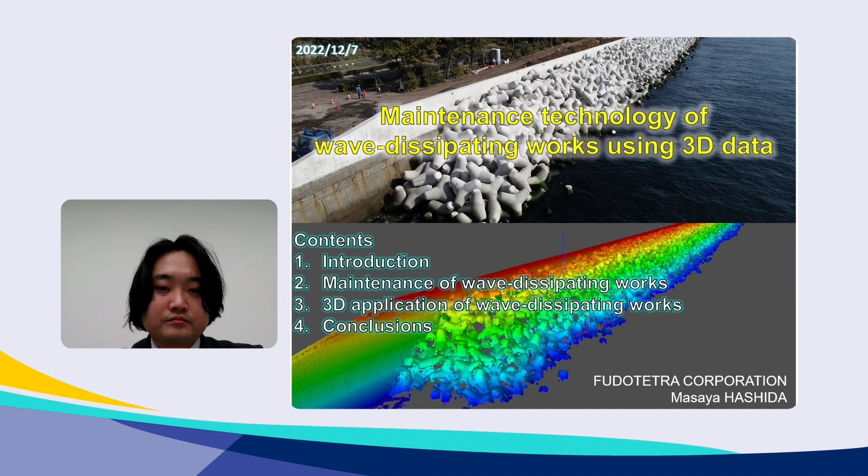While the Japanese population is aging and shrinking, productivity improvement in the construction field is also an important issue. The utilization of ICT, which means information and communication technology, and 3D data of structures is expected to contribute to labor saving, cost saving, efficiency improvement, and sophistication of construction works. 3D model information, such as point cloud data and solid models of structures, has begun to be shared through the entire construction stages of survey, design, implementation, and maintenance. This is in line with the construction policy of MLIT, the Ministry of Land, Infrastructure, and Transport.

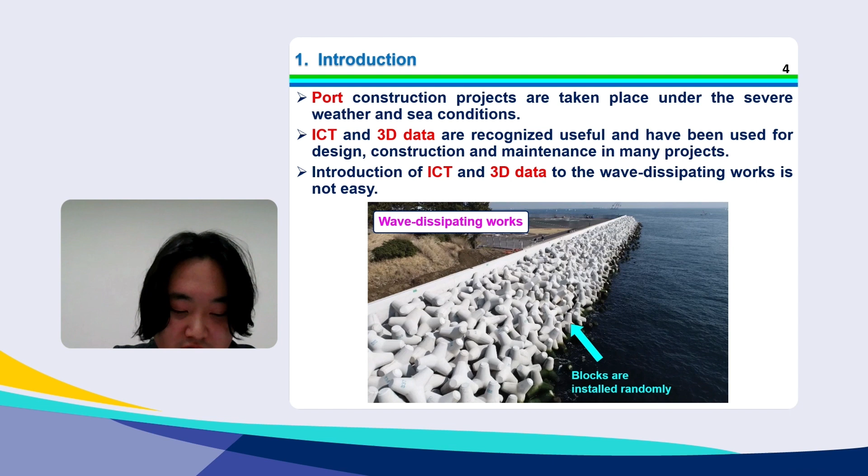As you can see, introducing ICT and 3D data for wave dissipating works is not easy. Today, I present the application of ICT and 3D data to wave dissipating works.

After installation, wave dissipating works gradually deform due to external forces, mainly waves. A deformed trapezoid may not be effective against waves and can cause overtopping and rough sea conditions around the facility. So the deformed area should be restored to the original trapezoid, but diagnosis is not easy because investigation is hindered by the complexity of the shape and the accessibility of the location.

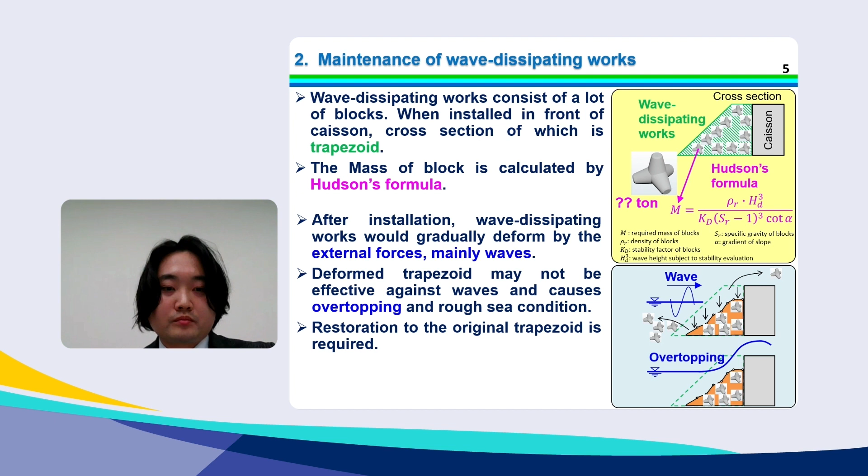This is dangerous and time-consuming work. The height of wave dissipating works is measured at each section and repeated in the direction of the breakwater extension. The outcomes are a number of drawings of cross-sectional profiles.

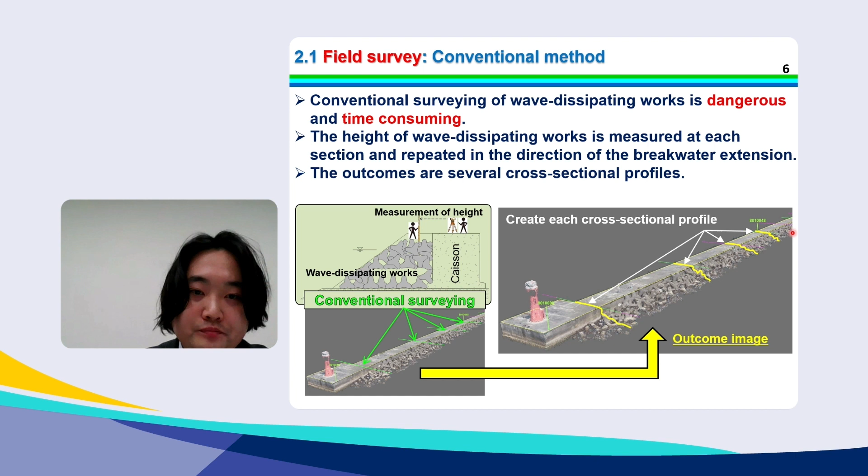Next, quantity calculation. When wave dissipating works has subsided, blocks may be replenished to recover the function. In order to determine the number of blocks required, it is necessary to calculate the replenishment volume. In such cases, the replenishment volume is generally calculated using the average cross-section method.

Conventional method is to take a specific cross-section which represents a certain length of a section of wave dissipating works, and the section volume is obtained by multiplying the area by length. Final volume will be obtained by summing up these section volumes. I call this method 1. The cross-sectional profiles are measured by a manual survey, as already mentioned.

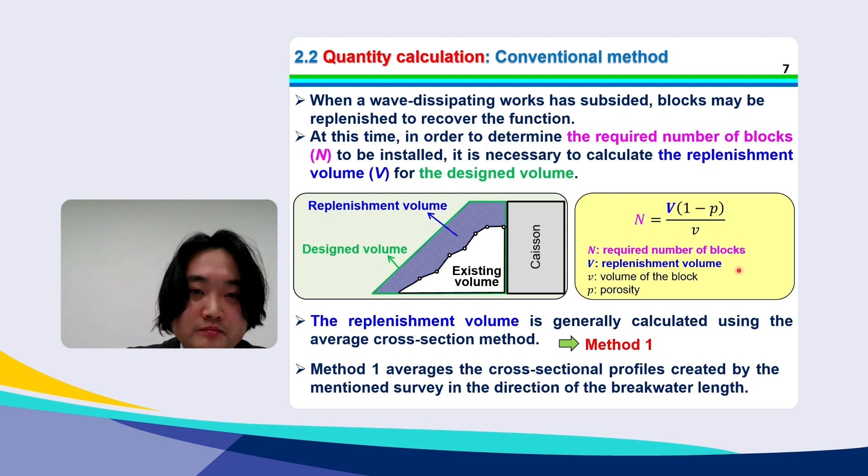Next is implementation. Block installation is conducted by a crane operator following the instruction given by underwater divers. As the target position of each block is not obtained by the conventional method, the installation is conducted by careful and harmonized cooperation of the crane operator and the divers.

The exact position of the block is only instructed by divers at the site. Divers sometimes go closer to the block to check the position and take the block to the exact position. This is very dangerous and time-consuming work because the block is unstable due to wave and current movement.

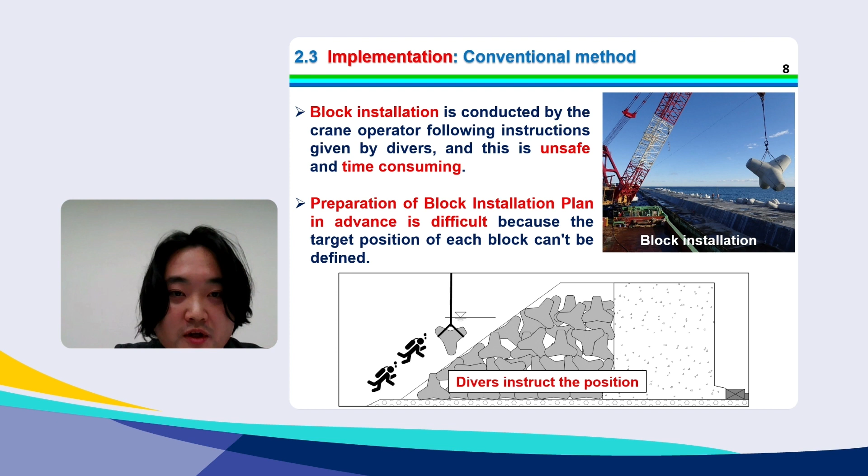Starting this slide, I will show you our study of applying ICT and 3D data on wave dissipating works. The first slide is UAV survey. UAV means unmanned aerial vehicle, commonly called drone. The main purpose of the UAV survey is to understand the three-dimensional condition visually and quantitatively.

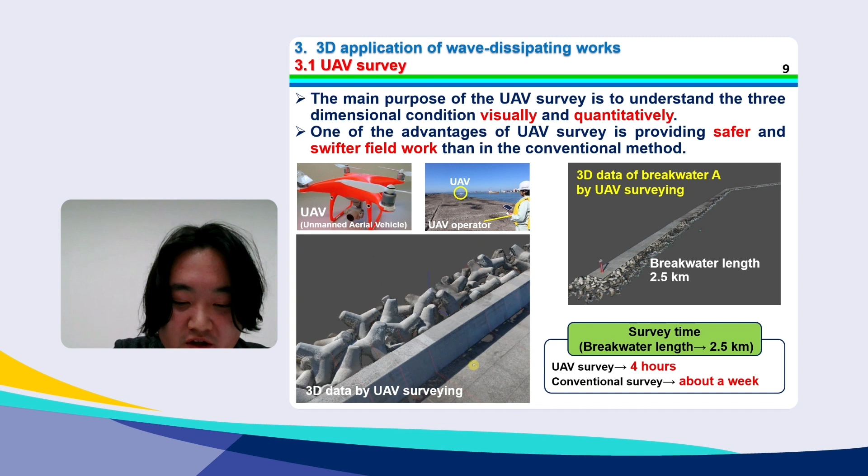As you can see in this video, the 3D data obtained by UAV surveying can be viewed from all directions. Please watch for a moment.

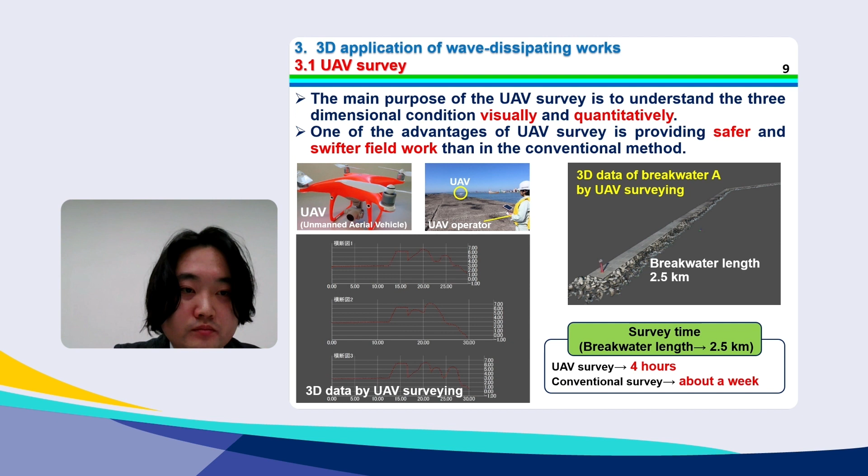One of the advantages of UAV survey is to make the field survey safer and swifter than the conventional method. As shown in this photo, nobody has to stand on the block, so it is safe. In addition, we can reduce the working time.

For example, the right figure shows the 3D point cloud data of a 2.5 kilometer long breakwater. The survey time on site was about 4 hours. On the other hand, when we conduct conventional survey, it needs about a week.

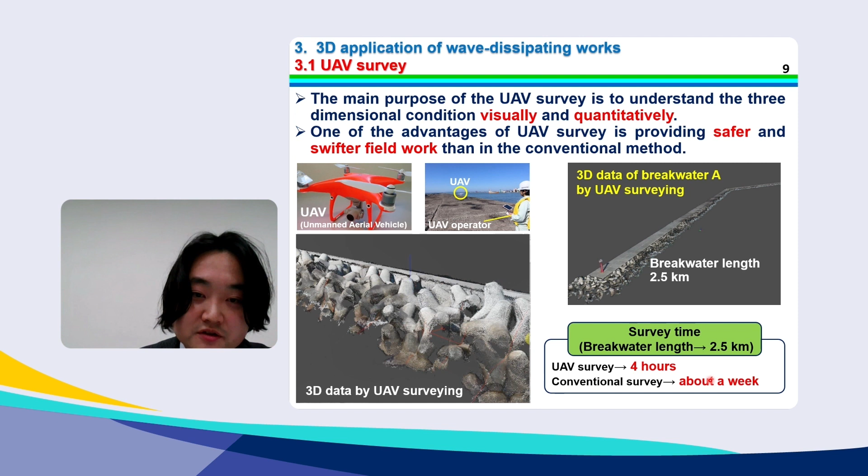Next, quantity calculation. As already mentioned, conventional method is a two-dimensional methodology: the summation of the average cross-section multiplied by the length of its representing length.

The replenishment area of each cross-section was obtained as the difference between the existing and the design cross-sectional areas. The replenishment volume was calculated by multiplying the average of the replenishment area of the two adjacent cross sections by the interval length.

On the contrary, 3D data gives us a direct approach to calculation of the existing volume. As you can see in the drawing, replenishment volume is obtained by a simple calculation of VD minus VE. I call this method 2.

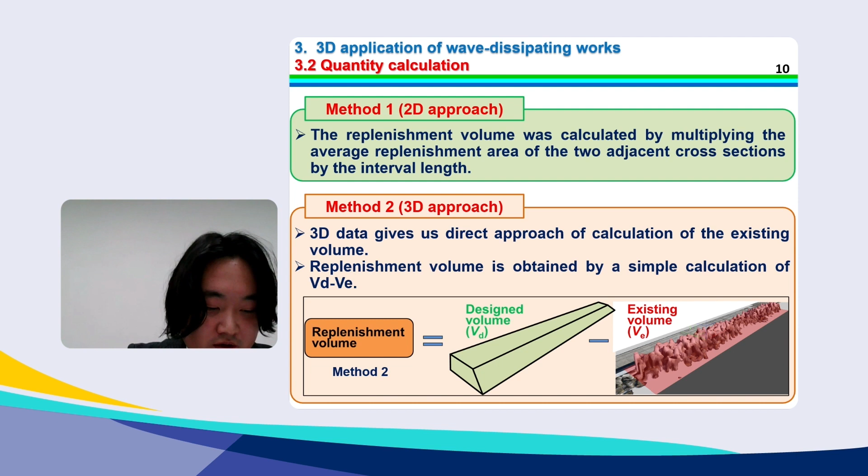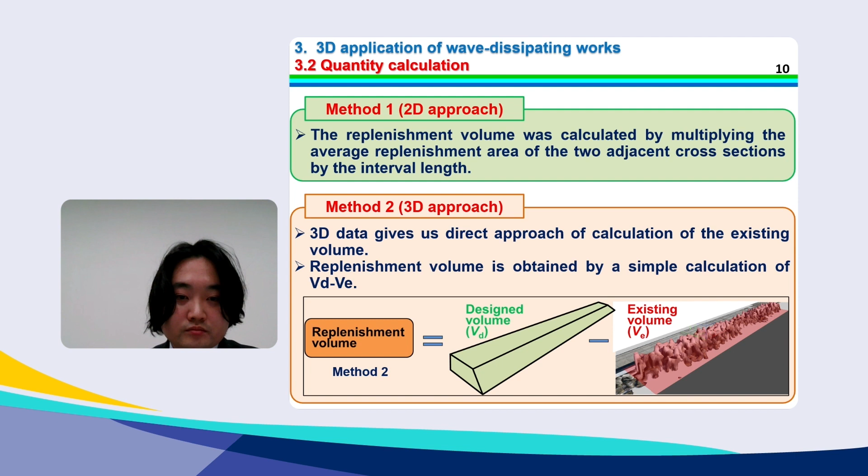Verification was conducted by calculating the replenishment volume at a section of 30 meters long. The work time for each method was also measured. The results are shown in this table.

The volume calculated and the time required for each case are compared as a ratio against the result of method 1 with 3 cross sections. The volumes calculated are larger in the order of method 2, method 1 with 7 cross sections, and method 1 with 3 cross sections.

This can be attributed to the fact that method 2 reflects the unevenness of the blocks in detail, resulting in higher accuracy.

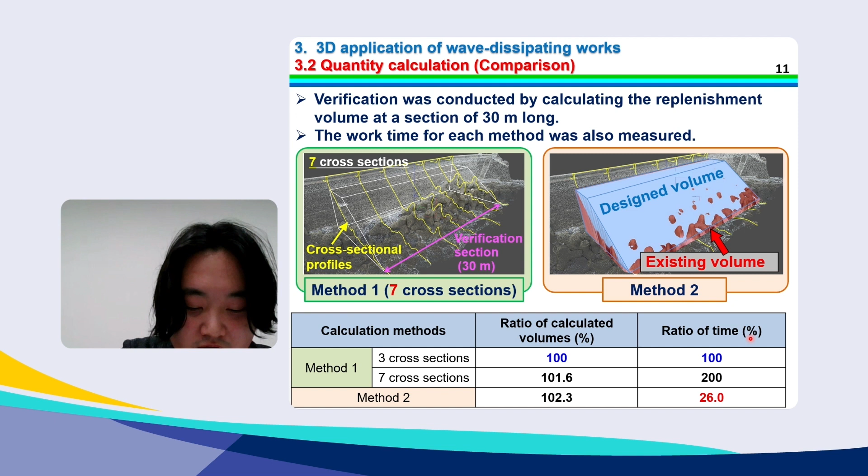As for the time required for method 1, naturally the calculation time is longer when the number of cross-sections is larger. On the other hand, method 2 enables the calculation of the existing volume in a much shorter time than method 1.

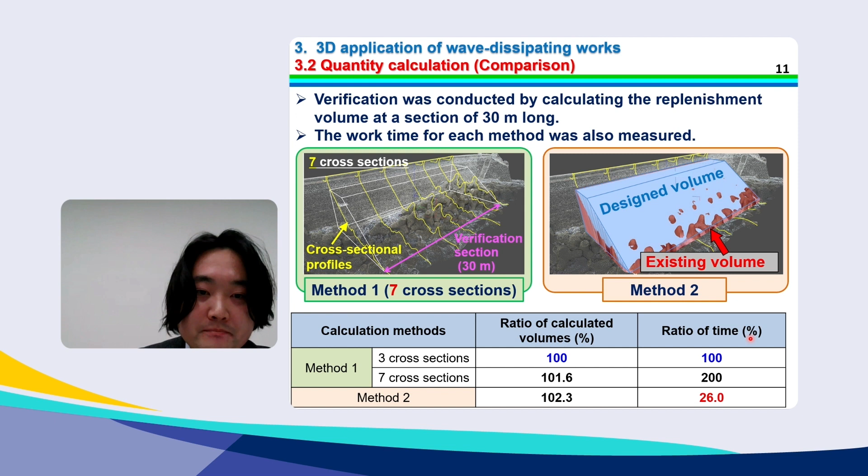Sometimes we need to show the degree of deterioration of the structures. In case of wave dissipating works, average subsidence of crown height may be an indicator for such purpose.

The photo and the drawing show how we can obtain such an indicator. By using 3D data, we can create a longitudinal profile of the crown height at any location.

The yellow line shows the designed crown height of wave dissipating works. The blue line shows the observed height, and the pink area shows the subsidence area of the wave dissipating works.

The average subsidence is easily obtained as the red dotted line by dividing the subsidence area by the section length. We can evaluate quantitatively the deterioration of wave dissipating works by using the average subsidence obtained from the 3D data.

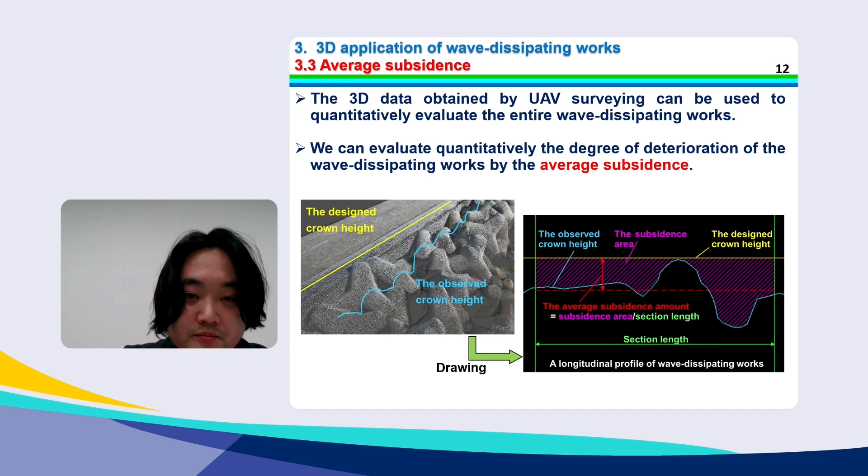The last topic is modeling of wave dissipating works. As mentioned in the introduction, the utilization of 3D models of structure is expected to contribute to labor saving, efficiency improvement, and sophistication of construction work.

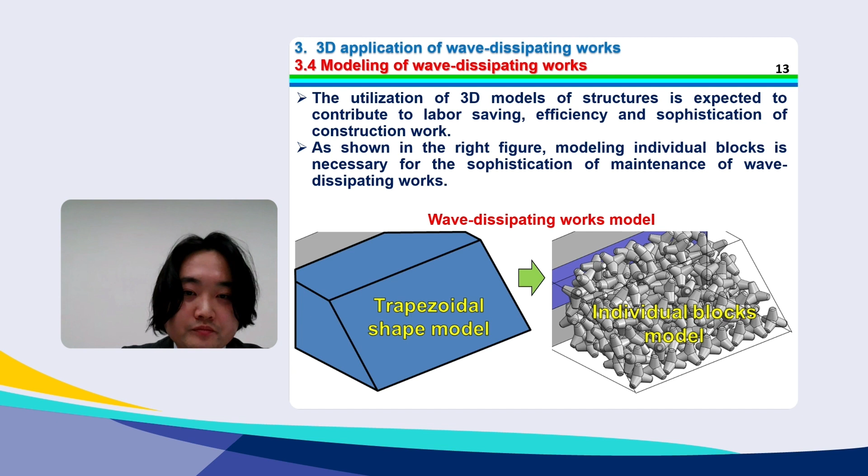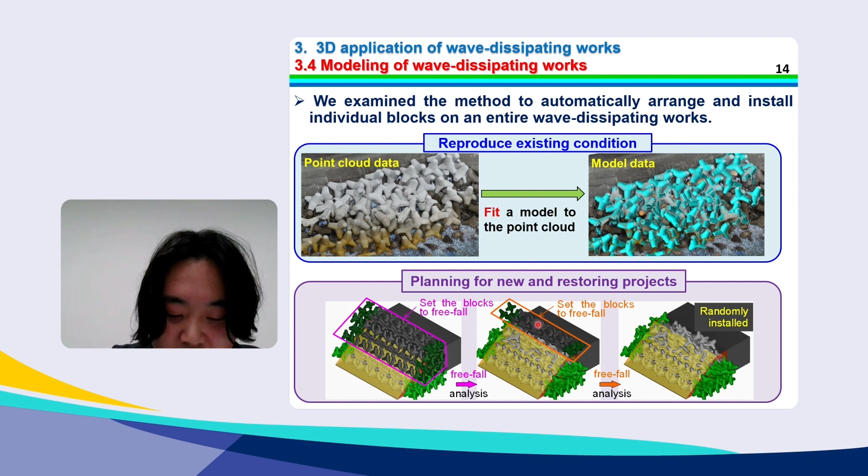This method can be used for construction planning of a new and a restoring project. The model is produced as a solid model and provides attributable information on each block. For example, the target position of each block can be obtained as position coordinates.

When installing blocks, the crane operator checks the target position and direction of the block at the monitor and decreases the diver's work. In this way, the operation becomes safer and swifter.

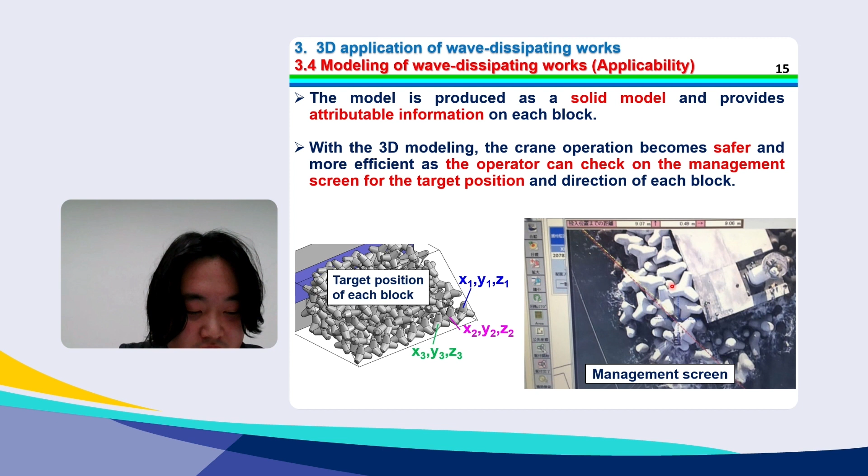Applying model data would make it possible to sophisticate the maintenance project of wave dissipating works.

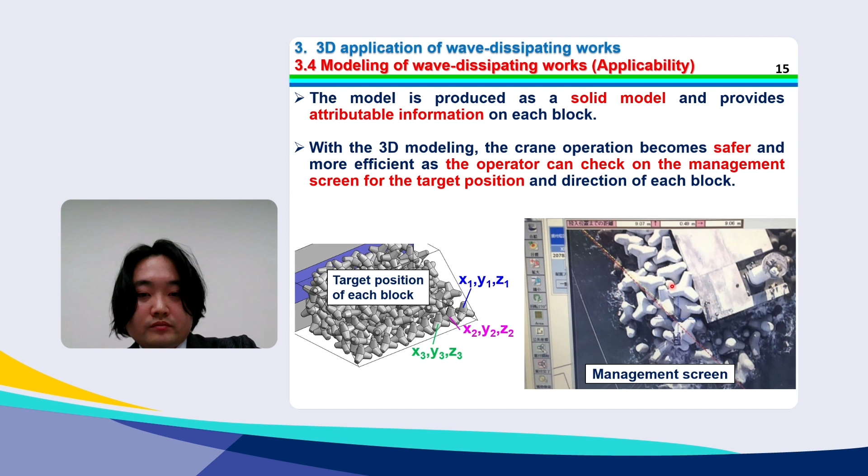I'd like to summarize the conclusion of this study. First, UAV surveying enables safer and swifter field work than the conventional method, resulting in more efficient and labor-saving evaluation of the current condition of wave dissipating works.

Second, application of 3D data makes the time required for quantity calculation shorter than the conventional method. Further application of 3D data, such as solid model, would make it possible to sophisticate the maintenance projects of wave dissipating works.

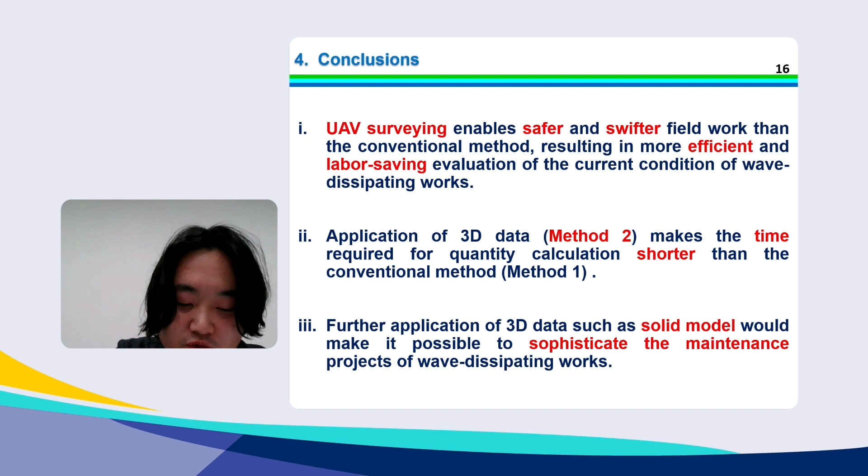Finally, we will continue research work to improve the reliability of the method presented today. Thank you for your kind attention.